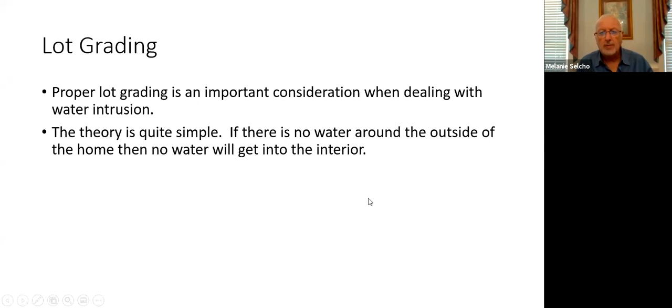We want to get that water running around the home, and there are a couple of different ways of doing that. When homes are built these days, even with a poured concrete foundation, they're usually going to have some kind of drainage system around that foundation from the high point to the low point, to get any moisture traveling down that lot away from the home.

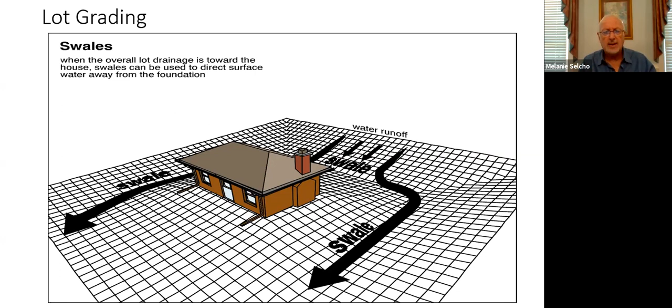This could involve trenching out the area and putting in some gravel and a pipe, then backfilling it so that any water that runs up around the home can actually be drained out.

The recommended slopes: in the front of the home where you have a concrete driveway, 1 inch in 4 feet of drop would be a minimum slope to get that water away. On the side, 1 inch in every 12 inches. That's where you want that water coming away from the home. This is really important on the side of the house, the 1 inch in 12, simply because lots now are shrinking in size, so your neighbor could literally be 10 feet away from you.

And if they have the same type of slope, there's usually going to be a gully in the middle, and the water will just sort of sit there.

Many homes these days are on an actual concrete slab. Not too many are being built on crawl spaces anymore because there's really no reason for it. The original crawl space came into place when heating and furnaces were first involved in heating the home. Way back in the day, there used to be a wood burning stove to provide heat in log cabins, with a dirt floor, et cetera. But for the most part now, there's no need for a furnace to be in a crawl space anymore.

If there's a basement, then that's one location. Sometimes it's in the garage, and sometimes it's even in the attic, pumping the air all the way down to the second floor and down to the first or ground floor. So there were different reasons why we don't need crawl spaces anymore. Certainly it's a great boon for us as inspectors not to have to go in there anymore, and that's great.

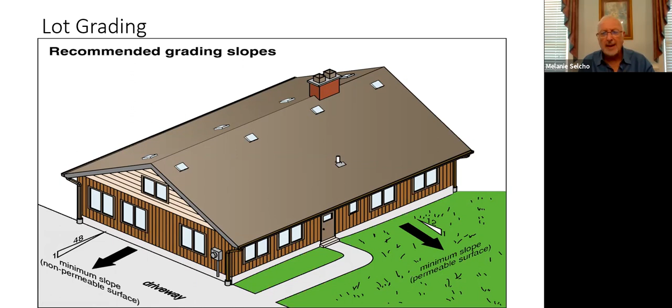So what it comes down to really is, like with all homes and our cars and our bodies, we need to have maintenance. We need to take care of ourselves, and we need to take care of our homes. Here's a good thing for any homeowner: constantly make sure the gutters aren't full of debris.

As we just mentioned, that would cause an issue with mold and mildew in the crawl space or basement area. So even with the gutters installed correctly, you can see what happens here is just a minor thing with how the actual shingles are installed.

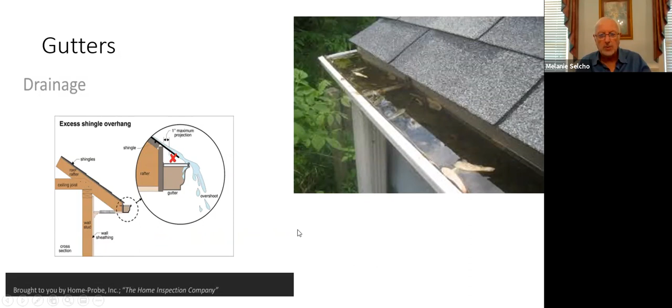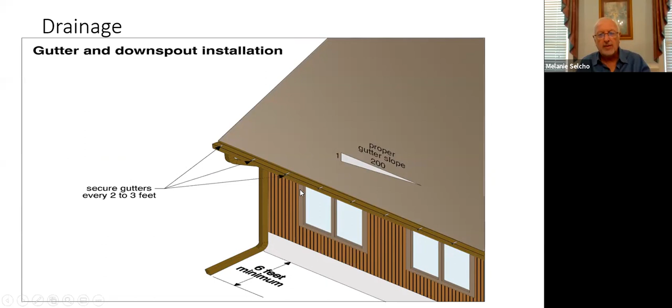They're also going to be secured every 2 to 3 feet. In this particular case, as we saw in the previous picture, it's a spike and a ferrule. The ferrule is that little metal tube that hides the spike. The spike is driven into the fascia board right where the rafter should be, to give it extra support. So that's the perfect way to install the gutters and secure them.

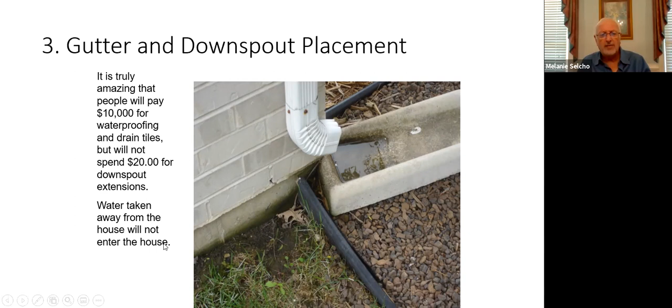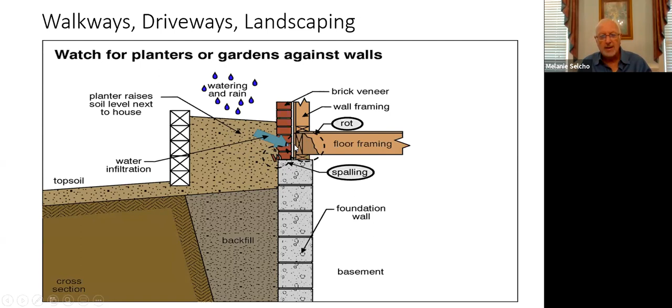So basically the weep holes allow air into the cavity, equalizing the pressure and allowing the water to drain out. And that's really important.

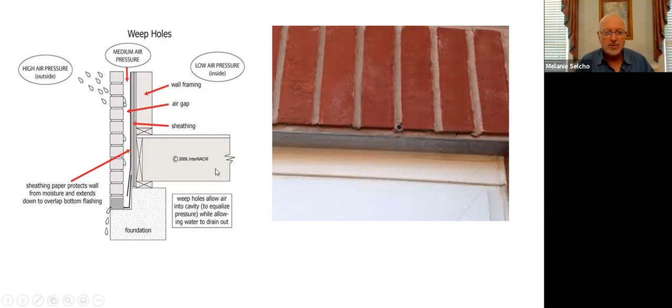If you look at this particular planter, it's on the outside, and you can see the brick actually goes all the way down below here. Here's our downspout. But the weep wicks are located 3 inches below the planter level, so you can see 3 inches would be sort of here or here.

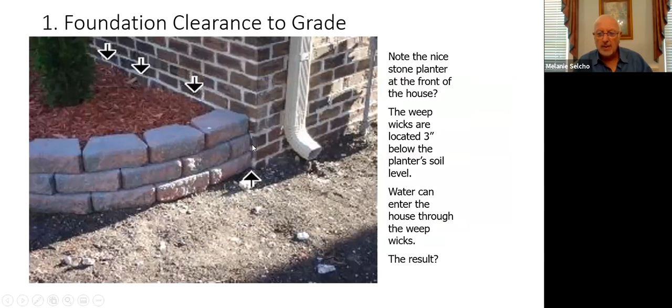And then what actually happens is rot. This is 3 months after the purchase that the buyer actually found the rot. The rim joists, floor joists, and sill plate were all rotted away, and it was a $36,000 repair bill.

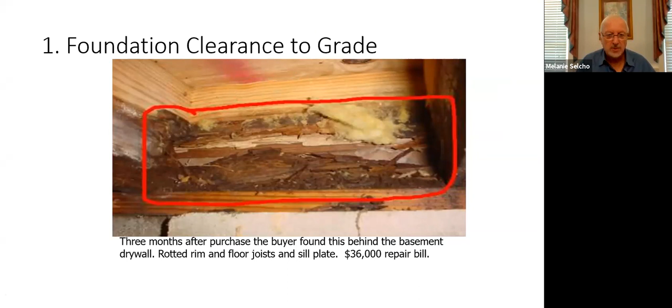Okay, retaining walls—they're also important, again for controlling the water that's approaching the home. They should have a lean towards the high side. So the higher the wall goes, the further the lean needs to go back into the soil.

If it's already leaning away, then that's an indication of movement, and once it starts moving, it doesn't stop. Repairs can be costly.

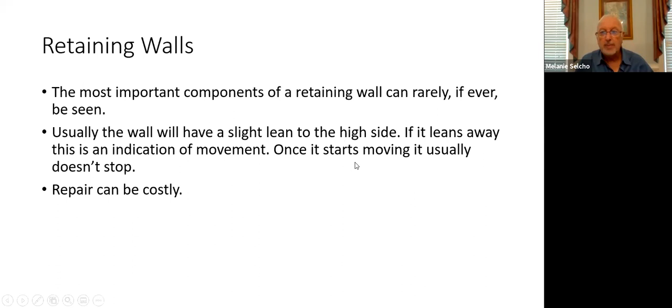So we're looking at sort of a cantilevered concrete retaining wall, which is the way they're done today. Sometimes they have stacked masonry block in a yard, which is another way of doing it.

But this is the way they do it with a poured concrete unit, where you can see the poured concrete right out front, and there's some rebar installed here for extra support at the point where the horizontal goes vertical. You can see our weep hole right here.

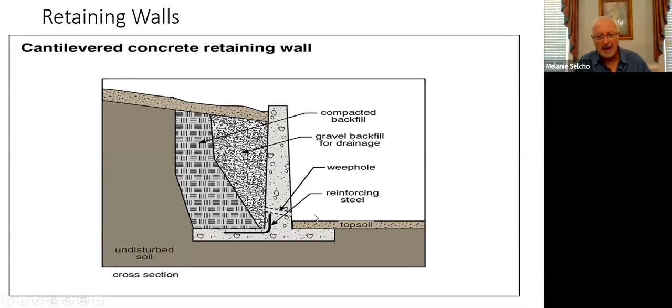They've got a lot of gravel behind the wall, so the water can come down from the soil into the gravel area and then go down into the weep hole and out. That's the way it should be done.

Here we're looking at it before the dirt is actually poured back in. You can see this is called a dead man—the extensions are in the back again to give extra support to the standing wall.

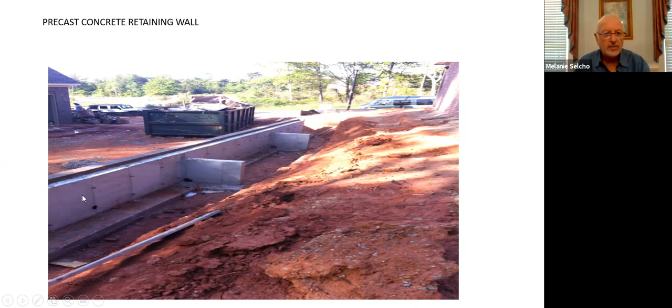You can see in the front there's a masonry finish, so you're not going to see the concrete. But you can see right here, and another one right there, are the weep holes. These are actually nice large ones—4-inch round pipes that go through to the front and exterior of that wall.

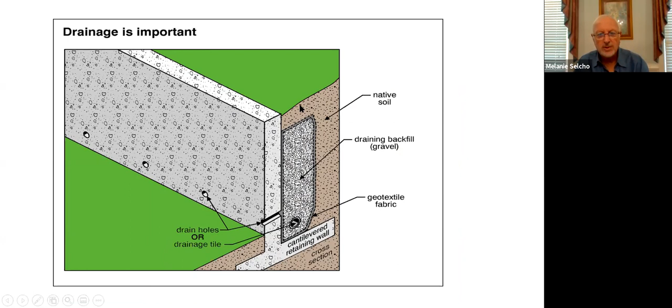So here we're looking again at the weep holes on the exterior of a concrete poured wall. Here's our weep hole, a drainage hole, and there's our gravel. The whole idea is all the moisture coming down the soil goes into the gravel area and then makes its way to the exterior.

It doesn't necessarily have to fall onto the seller and the buyer. Contact your city or county government, because as you know, there's a setback, which is city or county property that goes back—sometimes 4 or 5 feet, sometimes a little more, depending on restrictions in the area.

The county has both the wherewithal and the knowledge on how to repair this, so you could perhaps save your deal by having this information available. If you happen to see this while showing the property, you could contact the county or city and find out how to handle this particular situation.

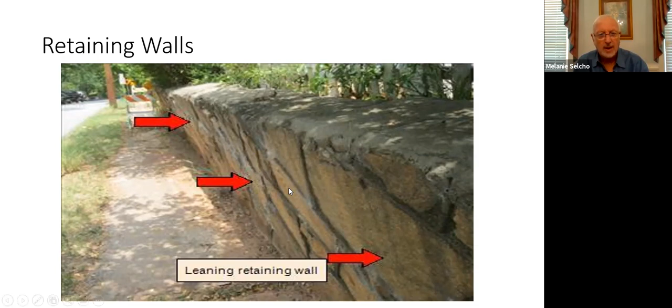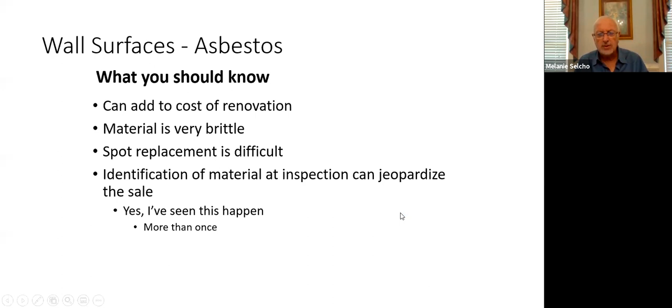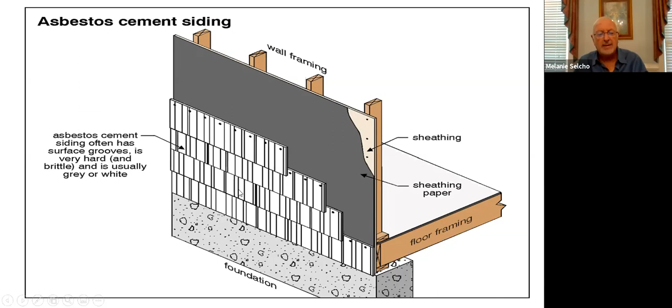When it comes to asbestos, let's look at it here. It's a cement siding that has asbestos fibers in it to hold the whole process together. They have little holes in them, and that's where they're nailed right up in. You can see these little holes here, and the way you can identify it is that it has a scalloped edge.

Now, the whole idea is, in order not to be concerned and have hazmat and all those people involved, you don't want to start yanking the stuff off the side of the house. Because once you do that, and it's as brittle as it is, the fibers are going to be released into the air, and that's what is the cancer causing agent.

So what we could report is, yes, you've got asbestos siding, but it can be encapsulated. Just think about what's behind the actual siding. You have a gypsum board, plywood, or even wood backing, then tar paper or a plastic barrier behind that, then the actual studs themselves, then perhaps insulation, and then plaster or drywall on the inside walls. So as you can see, there are several layers of protection between the back of the siding and the interior of the home where it's likely to be breathed in.

So by encapsulation, basically you come right over the outside of this asbestos siding and attach some quarter inch or three-eighths inch plywood or oriented strand board right over the top of it, screw it on, nail it on, and then go ahead and put on whatever siding you wish over that. Could be vinyl, could be fiber cement, whatever it would be. That would be the way to handle this instead of dealing with the hazmat, which becomes extremely expensive.

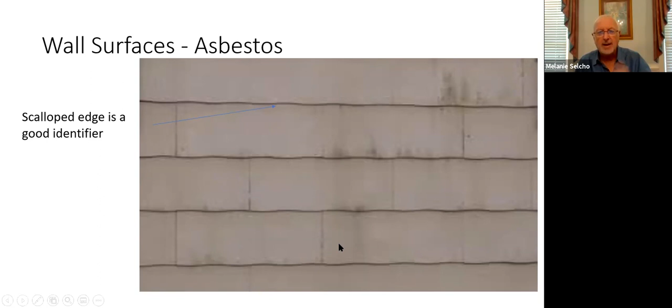You got the guys in the suits, you got to have it in special bags, it's got to go to a special place sometimes to dump. So in most cases, it's a lot less expensive just to go ahead and put new siding over the old stuff, and it's encapsulated right there, no longer a hazard.

Brick and stone. Again, with our construction here in the United States, for the most part what we're going to find is masonry veneer. It's not a solid masonry structural wall when we're dealing with newer construction with a brick veneer. You can see here we have a masonry tie, a metal bendable little tie that's actually nailed to the stud and then put into the mortar course that goes right here as you run across. So there's an air gap in the back. Here is our sheathing paper or house wrap, and there comes our brick veneer, and that's what it looks like on the left, that's what it looks like when it's completed.

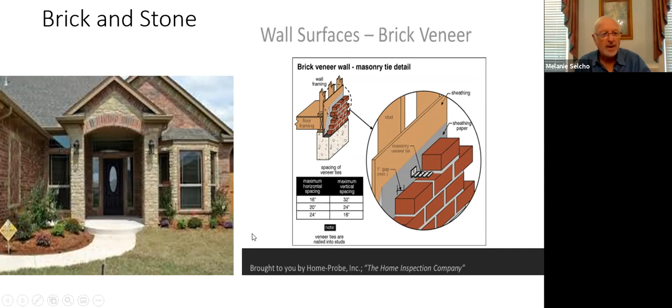If we see the home actually has a brick veneer, it's typical to have some cracks. So when we see the cracks, as the agent showing it, if you see multiple cracks and they're excessive, perhaps think about it—if there are large cracks bigger than a quarter inch, or if you can see they've been repaired multiple times, before you actually call in for a home inspection, maybe it's a good idea to have a structural engineer have a look at it. Or you can just take some photos, email or text us, and let us have a look at it on a picture, and we can advise you before you advise your client to get that inspection done, because if it is a big issue, it may jeopardize the sale.

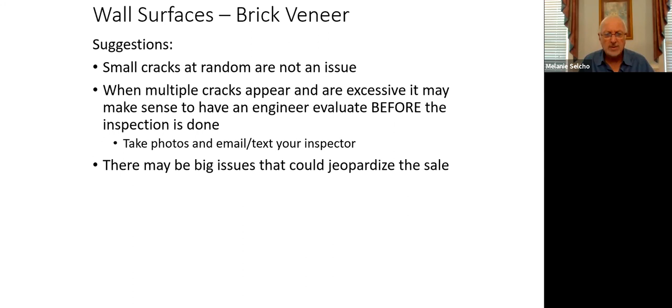So let's look at a couple of these little issues here. We see ourselves some horizontal cracks.

When you see these patches that have been done more than once, that's a sign to take another look at this area above the windows. Usually what you're going to find, like on the right-hand side here, is some fill-in being done on the mortar nicely, but there's also been some done on this wall right here, usually where the downspout is at the corner of the home.

If you have a horizontal crack, or a stair-step crack on one side of that wall, there's usually going to be a reciprocal crack on the other side of the wall at 90 degrees. So that's what we're looking at here.

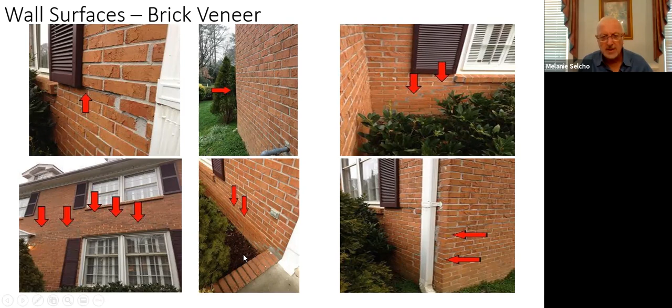Again, this is typical around a downspout or corner area where water is constantly getting in, right here in the corner where the slope is near the foundation. It's causing it to settle some, and it can be repaired.

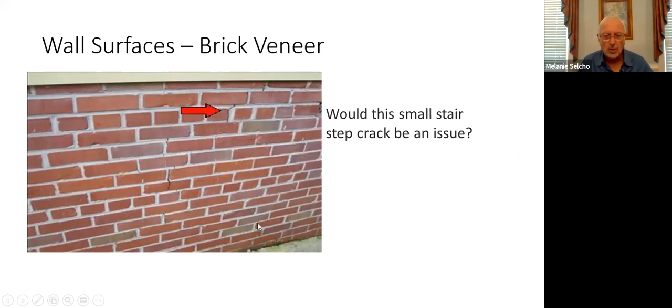So this is what the stair-step crack looks like. In this particular case, it hasn't been repaired before. Perhaps just coming and pointing it up for now, and making sure the water is actually getting away from the home, would be an easy repair. Here's another closer picture of that stair-step crack.

So this is what it would say under observations and recommendations in the report: numerous cracks in the brick veneer around the home, evidence showing that these cracks have been repaired at least once previously, and cracks have increased since the repair was completed. There's differential movement between some of the bricks, indicating lateral as well as vertical movement. This appears to be an ongoing issue and needs to be evaluated by a qualified masonry contractor and possibly a structural engineer.

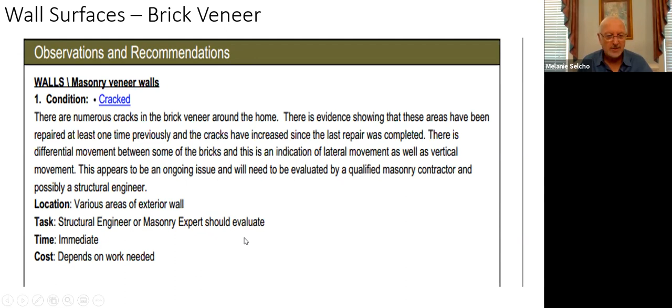So that's how it would be reported if we came to the inspection first.

Okay, next up, stucco. Is it the good stucco or the bad stucco? That's where it was 10 years ago, was the question. Is it the good or the bad? The fact is that they're both products that have been out there for a good long while.

As an inspector coming up to a home and looking at the house, you couldn't tell without tapping on it or looking for other clues. If it had a lot of cracks in it, then it was the hardcoat stucco. But they all suffer from installation-related issues. When I built my home, I actually went for the EIFS, or the so-called bad stucco, and it's an amazing product.

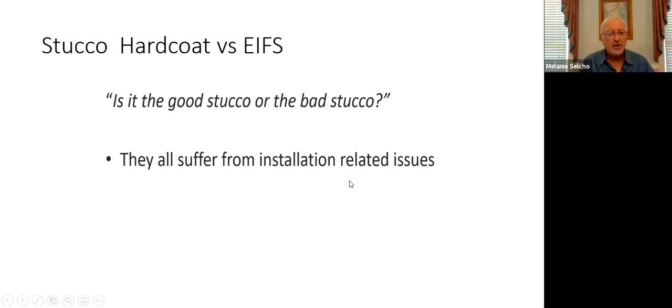I've been really happy with it for all the years. Everything comes down to the installation.

So we're going to report: are there significant or excessive cracks, numerous cracks? Is it installed below grade? Do we have the kick-out flashings, which is really important? Evidence of moisture anywhere and deteriorated caulking? For both of these products, the caulking, the flashings, and the maintenance are the biggest issues.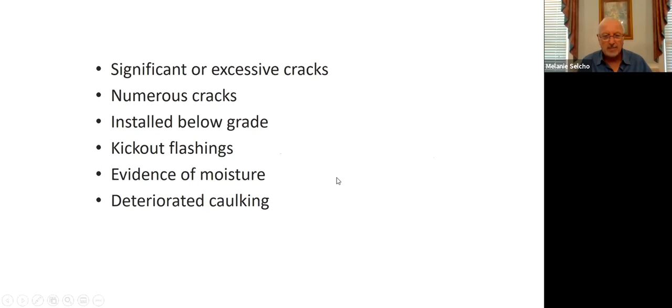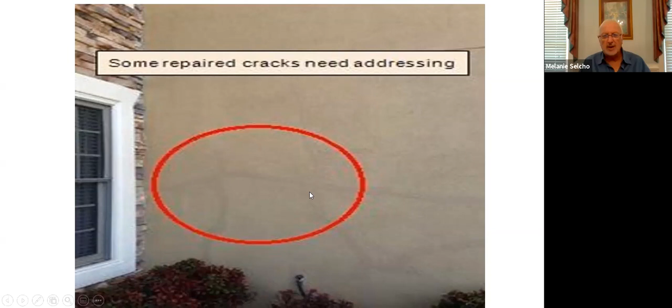So even here, you can see the crack, and it's been repaired. But whatever you do on a cement-based or hardcoat stucco, you are still going to be able to see where those cracks were. Unfortunately, there's no way to hide those.

Look at the process on a 3-coat hardcoat stucco. You can see here we've got our sheathing, then our building paper or plastic wrap, a metal lath like chicken wire, and then you put on the first coat, called a scratch coat. Then there's the second coat called the brown coat, and then the finish coat. The most important thing here, besides not being in the ground, is that bottom drip screed to stop water from wicking its way back up behind the bottom of the stucco itself.

The same applies to the synthetic stucco. You can see right here we have the insulation, which is a whole lot thicker than what we had back here. That's why I'm so happy with it, because I'm able to have it well insulated, and it's easy to take care of.

And in this case, instead of a metal lath, we've got a little plastic glass fiber type mesh, and it's only 2 coats, a base coat and a finish coat, and it's actually held together with a fastener.

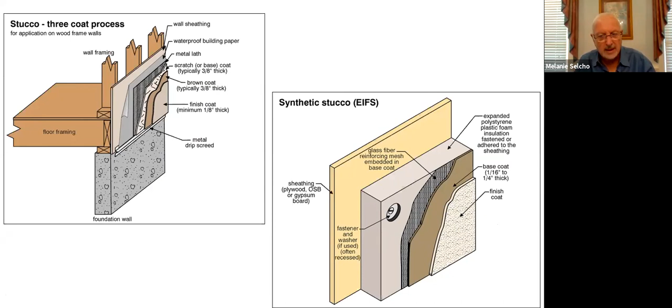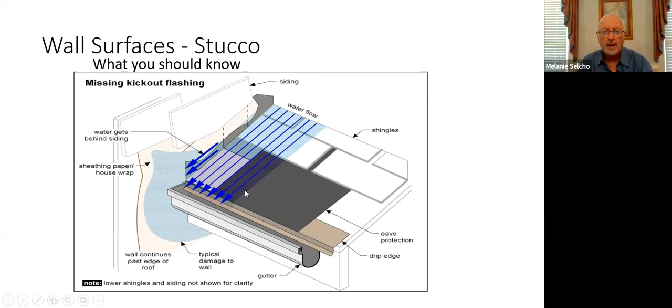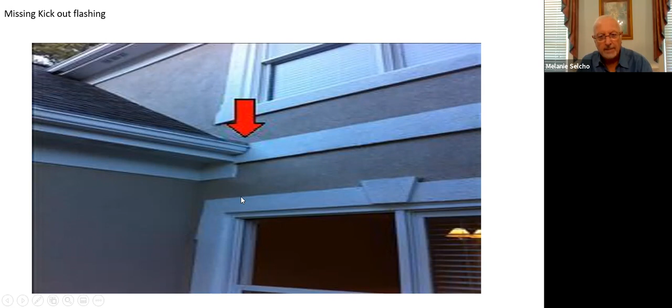Again, installation is the most important issue here. We talked about the missing flashings. Whenever there's a 2-story home with siding of some kind, brick, stone, or stucco, we want to have that flashing behind the wall, then a 90-degree curve at the bottom to get whatever water flow is coming down the roof into the gutter. We can see right here where there is flashing behind the wall, but there's no kick-out flashing at the bottom. So the water runs down and makes its way into the wall above the structure of the window, and it rots out from below.

Metal and vinyl siding, two of the items here. This is back in the 40s. It had steel siding with patterns on it, aluminum siding, and vinyl, all different. The aluminum siding, whenever you played baseball or tennis and dinged it, there was a bend you couldn't get back out, so you had a ding in it from that time on. Vinyl held up a lot better, and it was a solid color material, so any scratching didn't reveal the color below.

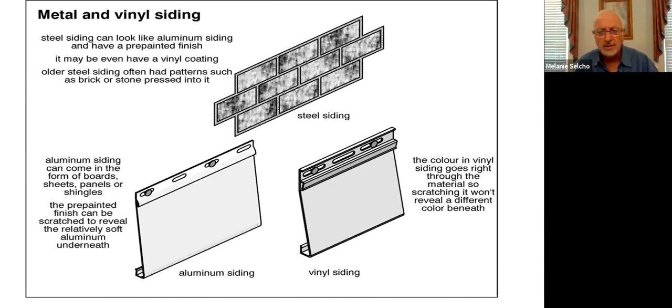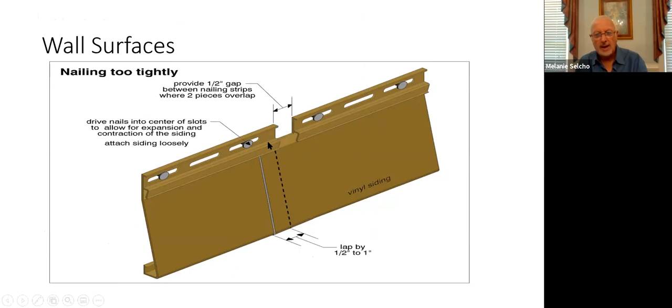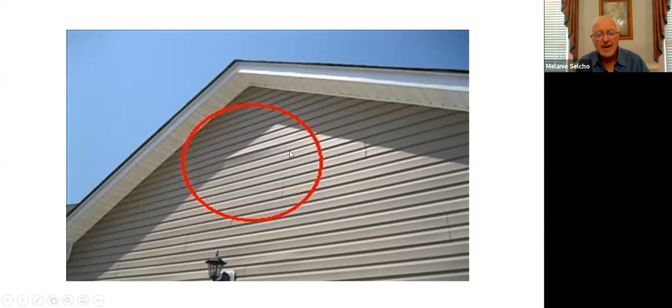Also important about the vinyl is that it shouldn't be nailed, and aluminum shouldn't be nailed too tight to the actual structure, because with expansion and contraction, it needs to be able to move. You leave a little gap between the back of the nail, and you can see the actual opening is not a round hole for the nail but an oblong one, so the siding can move. Somebody ought to do a little cleaning up on this with a pressure wash before putting it on the market. But here you can see where the siding was installed too tightly, and with the sun going down on it, it expanded and started to bulge.

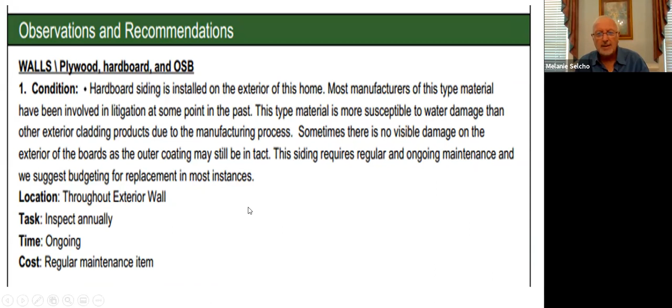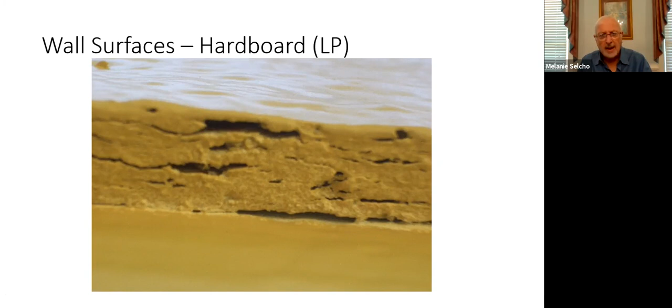Then we get to hardboard siding. Hardboard siding was around from about 1990 to 1996. It was involved in litigation, a class action lawsuit. It's way past its time now, so there's no remuneration for that. But again, it came down to maintenance, and folks didn't maintain the siding. So what we had here was deterioration, the delamination of the actual material. It was pieces of wood, wood chips, and glue originally manufactured as a recyclable product. But the edges are not painted or caulked, so it deteriorated and literally fell apart.

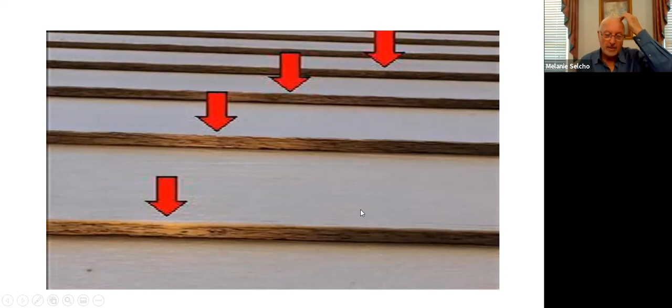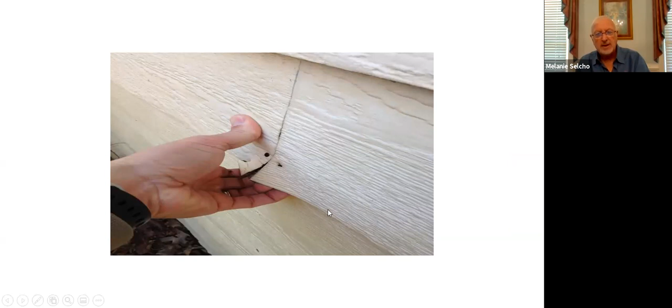You can see there's a ton of it still out there, folks. With any houses built in the 90s, there are plenty that still have hardboard siding on it, and depending on how well it was maintained depends on how much would have to be replaced, or in our report, it would just mention constant maintenance is needed. You can see here where it's rotted, even though the face doesn't look deteriorated, it actually is. In this case, what can be done is pull out the rotted stuff and replace it with HardiePlank, hardboard, or cement-based siding slipped up. They're making hardboard siding, the HardiePlank siding, with a similar grain. Even though you'd probably have to paint that side of the house where the repairs were done, it can actually be done.

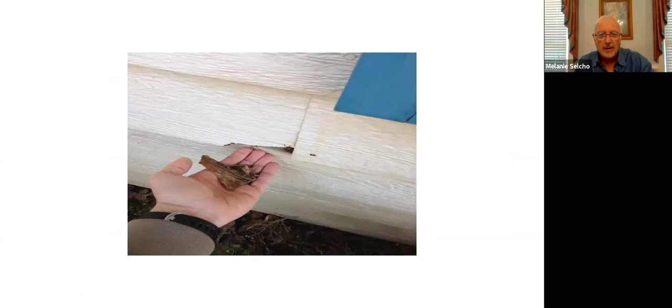I also want to keep siding away from being too close to grade. You can see right here where the wood siding is in the dirt, so it rots away, or the critters start chewing on it. Certainly a great attraction for termites right there.

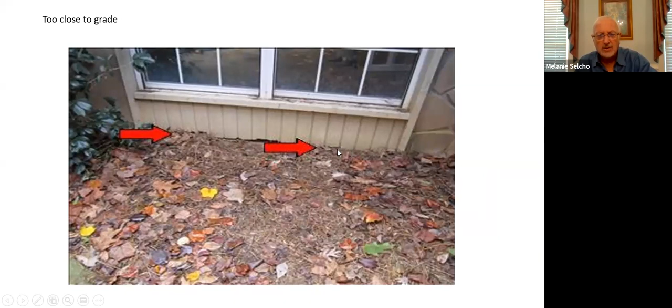As far as decks go, it's really important to have the bolts going all the way through into the structure. We need lag bolts with washers on them along that ledger board. But the most important thing is that the flashing extends over the ledger board and goes up behind the siding. That's going to protect the bolts, because even though they're metal, they will actually rust out over time.

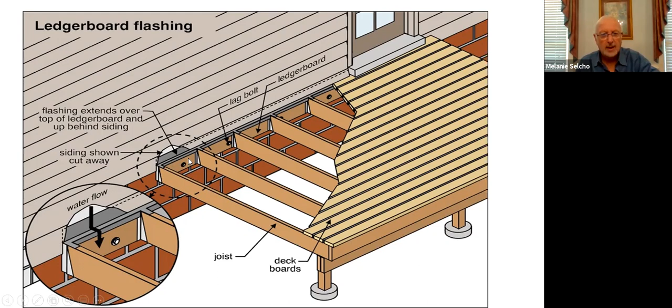And if you've got a party going on and lots of weight on there, it can shear off right here at the connection to the home. Wood to soil contact as well is important.

Pressure treated lumber today is not what it was 30, 40 years ago. Those chemicals were draining off in the Atlanta area and getting into the Chattahoochee River and floating downriver, causing a lot of fish to die. People down south of Atlanta like their fish in the water rather than floating on top of it.

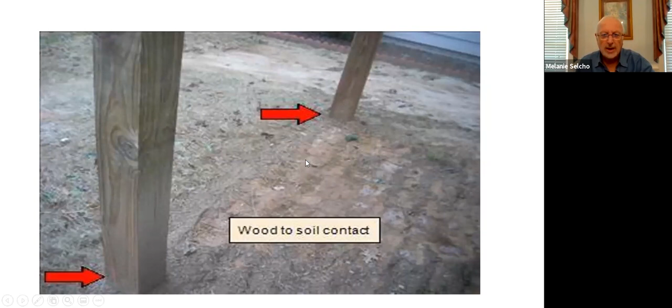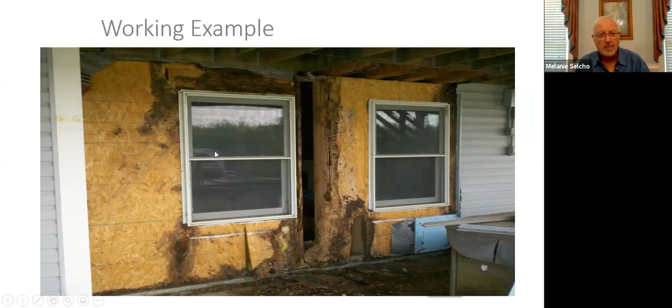So here we can look at a deck that actually collapsed due to lack of flashing, and you can see the damage that goes on behind the wall. You can't see a lot of the stuff that's going on. We had some vinyl siding, and the vinyl siding was hiding all of the destruction taking place behind this wall. It would have cost a couple hundred dollars to have had some flashing installed right above the ledger board.

So there we are. That's covered our webinar on the exterior.